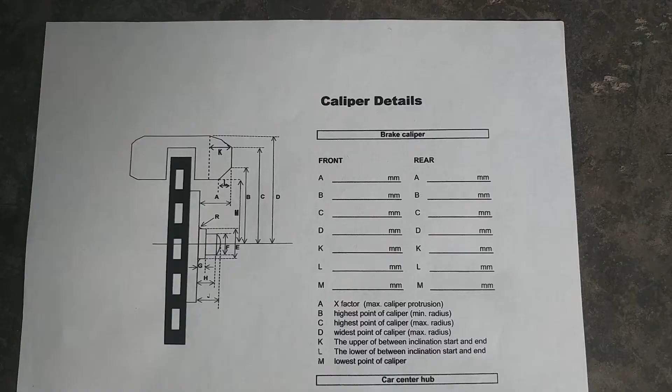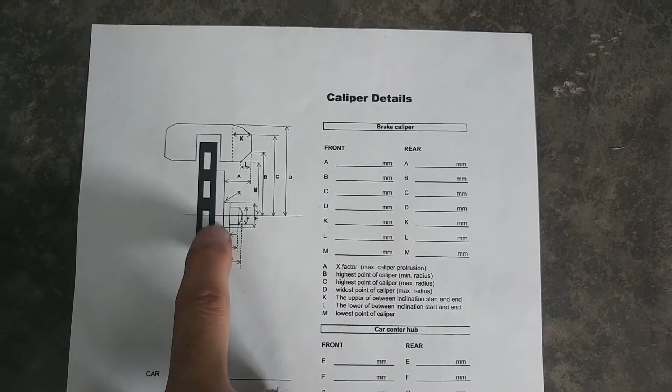All right, so here are some of the dimensions they are looking for. You can see there are two columns for front and rear brakes, and you're looking at all of these dimensions. Everything has got a letter defining what it is and where to measure from. Usually everything is measured either off the center of the hub going radially out to the brake caliper and the rotor itself, or it's measured from the surface where the wheel touches against the brake rotor, the mounting surface. It's either out this way or up and down radially based on the center.

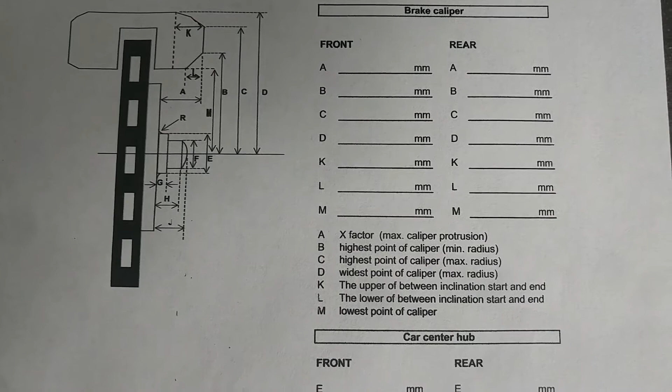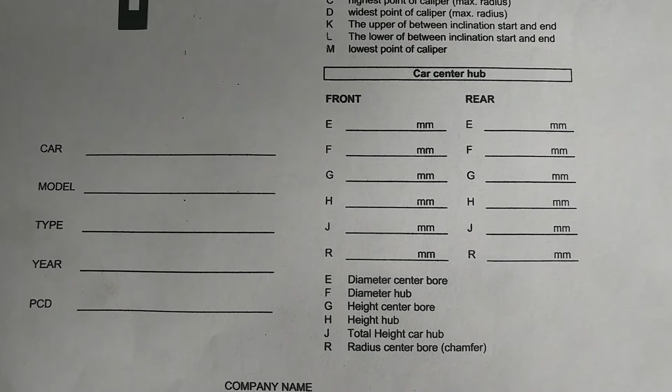So what they're going to do is look at some of these dimensions: the highest point of the caliper, the widest point of the caliper, the inclination start to end, etc. Then we're going to look at the hub, the diameter, the height, everything else. Now this stuff, the car model, type, year, PCD, all that will be based on my car, and then I'll show you.

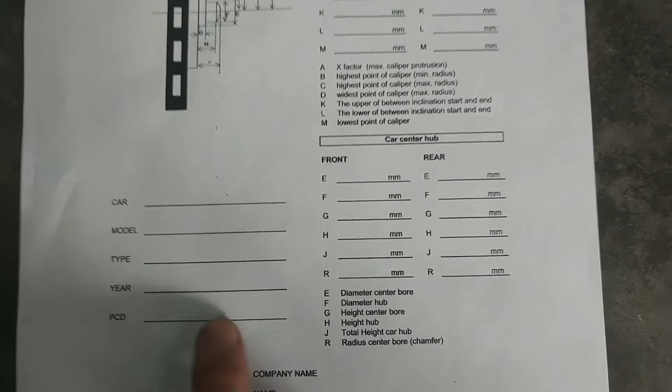So this is what we're measuring against. This is the M2300X brake caliper kit that you can buy as an aftermarket part, from Ford Performance or anywhere else. I got mine through JAGS, but this is what it is. It's a 13-inch slotted rotor with 4-piston Brembo brake calipers.

So let's go ahead and get out some calipers and we will start getting measurements here.

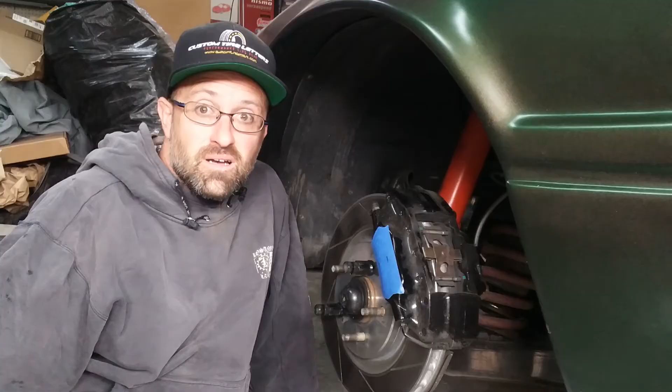All right, so I've got the front now measured for everything. I haven't done the rear yet. So essentially these brake calipers honestly are not blocks, right? There's a lot of curvature to them. Even on the front edge here, between the top and bottom edge of the pistons themselves, there's some radius or curvature on this side.

So some of the things they're looking for here is, one, the hub dimensions, especially from where the brake rotor is, where the mounting surface is, to the edge of the spindle here where it comes out, the cap itself. Remember, I've got the lug nuts on here just to hold the brake rotor steady onto the surface of the spindle.

Beyond that, you can see it's down to the bottom edge here, so make sure the wheel hub fits in there. You can also look at the curvature from the bottom edge here to make sure the spokes come up from the hub itself, over the caliper or the edge of the pistons here. Then also looking radially from the center of this hub out to each step, to make sure that the spokes of the wheels, especially with a low offset or a high offset as you vary that out, will come in and out close around this, especially on the big brake kit.

So I think I've got all the dimensions there set up. Now these ranges kind of depend on what it is, but everything is either based spatially across the car, so away from the surface, each of the details of the hub, the cap, everything else there, and then also on the surface this way from here out to the edge, and then radially from the center of the hub going out, looking at where the caliper mounts at the bottom curvature here of the piston, the top curvature, looking at this, and then even the surface out here to make sure you're on the drum of the wheel itself.

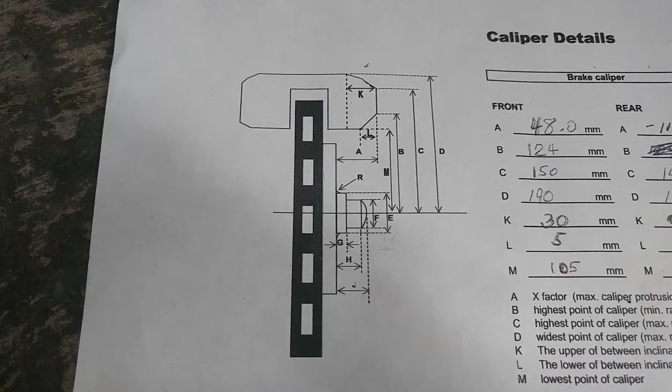So here are some of the dimensions that they're looking for, and you can kind of see what matters between front and rear. Just looking at some of this, you have your brake rotor in here, which is this. You have the hub itself for the rotor, and then where it attaches to. So on this part you have a little bit here that is going to be your cap, this little curvature. You're looking at radius between, if there's any, between the spindle itself or the brake rotor. You've got your caliper - and of course calipers are not exactly as simple as what they're showing here - but you've got your dimensions, your radial dimensions from the center of the hub out to the bottom of the caliper, looking at your curvature where this happens, and then you've got your top and your dimensions in that. So you've got various pieces.

So radially you're looking at stuff, looking at 124 out to B, which is the bottom here, 150 to here. You've got D, which is 190 on the fronts, where it's only like 150 on the rear. So just looking at some of these caliper dimensions there, if I come down here to the center hub for the car, you can see that the center hub on each is about just under 71 millimeters. You've got some caps, some other pieces in here, but where they are similar front to back, you're going to see that they're pretty darn close, within a millimeter on everything.

And then of course they want to know a little bit about the car, just for reference. So of course the car is the infamous WideFox. It's a Ford Mustang, a notchback coupe, which really doesn't matter in this case. It's a 1980, but details of it are you have the SN95 spindles, the Ford M2300X big brake kit, which is the 13-inch rotor, the Brembo 4-piston caliper. It also has a 3-inch wide body, just in case that matters.